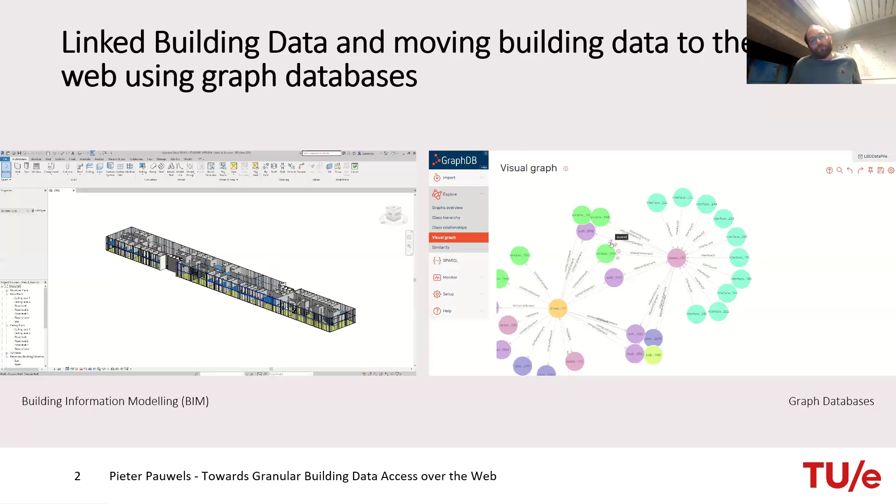So one of the ambitions that I have had for quite a long time, it's on the title of the slide, is to actually move our building data from these 3D modeling environments into the web so that we can interact more directly with it. Similar to how we are able to log into our flight, log into our building, log into our hotel, book ourselves an Uber, I would really like to be able to log into our building and actually know what the information is about this building. So that's why I'm trying to do this.

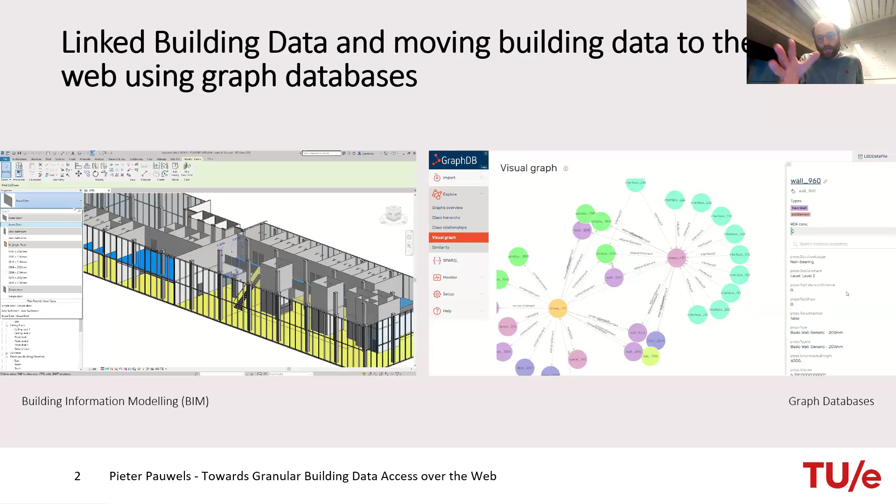During the presentation, I will cover some of the information that you can see here on the slide, which are ongoing research projects. They are situated around 3 topics, namely smart buildings, robotic navigation, and circularity.

Why is that? If I have to explain what we do in terms of information systems research, we very seldom make an IT system or a data system just for the sake of making it. We want to make it for a purpose, and these are the purposes. We want to make smart buildings with a decent background infrastructure. We want to enable circular reuse of materials and resources with a similar backend. And we also want to enable indoor robotic navigation, also using the same backend data set.

So I'll guide you through this. For this talk, I have two big parts. The first one is on buildings and semantics and gives a bit of background on building information modeling and linked building data, which is related to the topic of digital twinning. What does digital twinning look like in our building sector? The second part will be digital twinning in action, where we'll cover three example cases to show what we can do once we have a data-oriented digital twin.

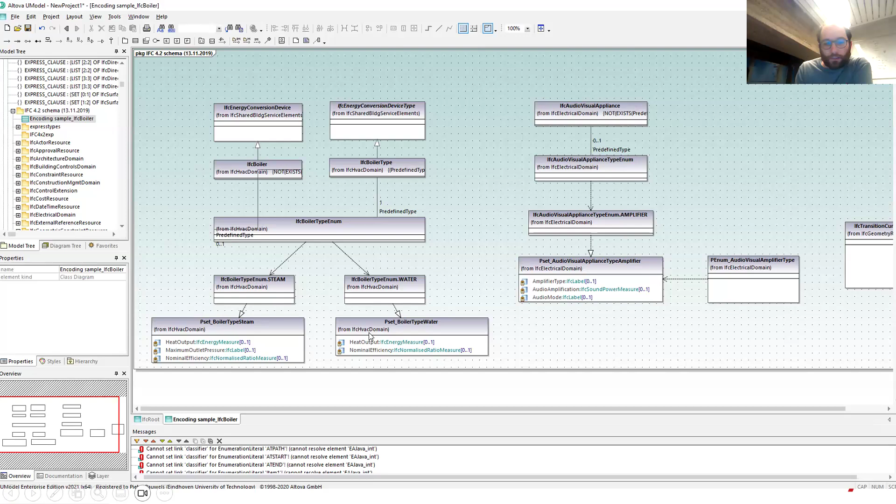And we have several schemas for that. So many of our software systems have object-oriented models. This is an example, a UML class diagram in Altova software, that shows the biggest foundational schema we have for our construction sector, which is the Industry Foundation Classes. These are the foundational classes of our construction industry, comprising approximately 1,000 classes, many properties, relationships, and so forth. So we have a full schema model for our built environment, which allows us to communicate about our built environment. The idea is that the different software environments we have are able to export their information following this format, or this data model in any case.

The data model, which is in a class diagram, or at least I kind of see it as a class diagram conceptually, has a couple of serializations. It has an Express schema, an XML schema, a declaration schema, an OWL schema. Those are on the schema level and therefore equivalent, capturing the same classes, relationships, and properties. On the object side, on the instance side, we can export our building models as an IFC file, an XML file, an RDF file, or a JSON file. So those should also be equivalent. We should be able to choose the data format we're exporting our building model in.

So what I'm trying to say here is that our building industry is a very structured industry. We try to organize our data. We have a very good class diagram of our industry foundational classes. And this allows us to actually work with the data across our industry to a good degree.

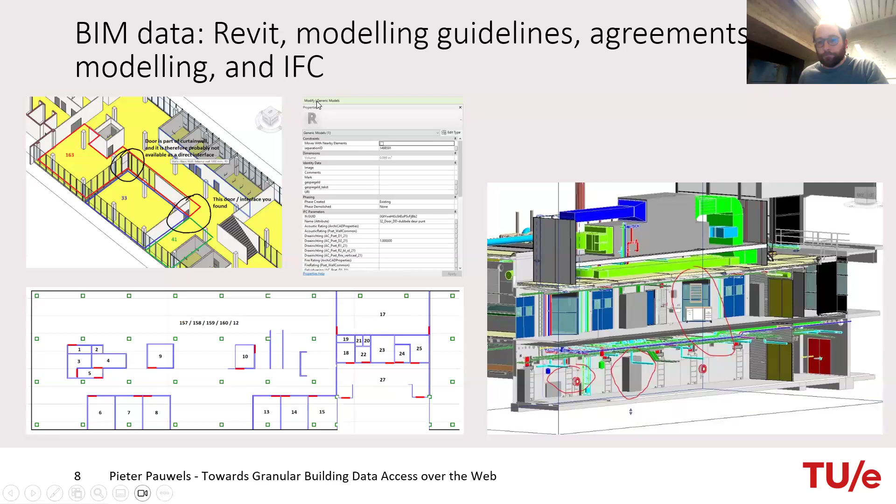But okay, so far so good. Let me give you a bit of background. In our construction industry we have a very big set of classes which allows us to define buildings using the same data model, the IFC Industry Foundation Classes data model.

One of our goals was to make this IFC schema available as an OWL ontology, so we can link it with other data sets. For example, we can link it to infrastructure data, railway, tunnel, and so forth. We can also link it to sensor data, geospatial data, and together have one large linked open data cloud of construction and architecture. So besides the real world, we could also have the linked data version of our real world, interconnected across those domains. This was 2014, so more than 10 years ago.

It's quite old, but this was the initial idea. Based on this, we formed a community group which started standardizing the way we make this IFC OWL ontology and how we link to other domains. Several of you in the room know what this has been.

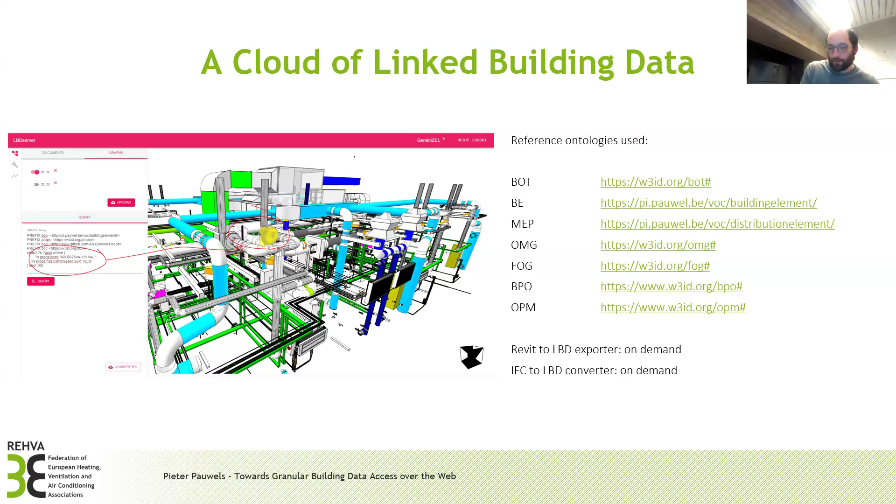So yeah, we have a whole list of schemas. I'm not going to extend much more on this, but it gives us a lot of opportunities to decide how we want to define our building and all of its information.

So this was, in a nutshell, the story of BIM and linked data. What I tried to tell you is that we have a structured building sector. We've been struggling for a long time on defining all the classes and relationships we want to store for a building, and what information we want to keep track of. In the last few years, we're increasingly trying to move to the web and make sure we can connect to mainstream software tools that allow us to handle this data on the web.

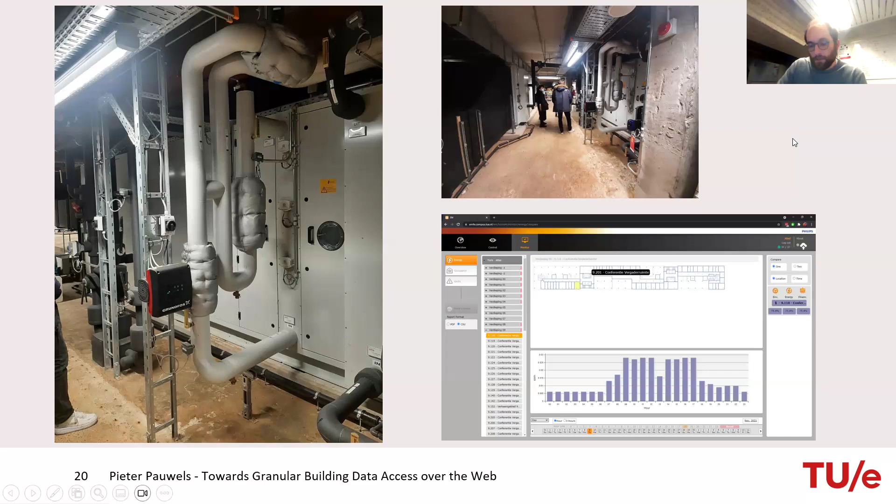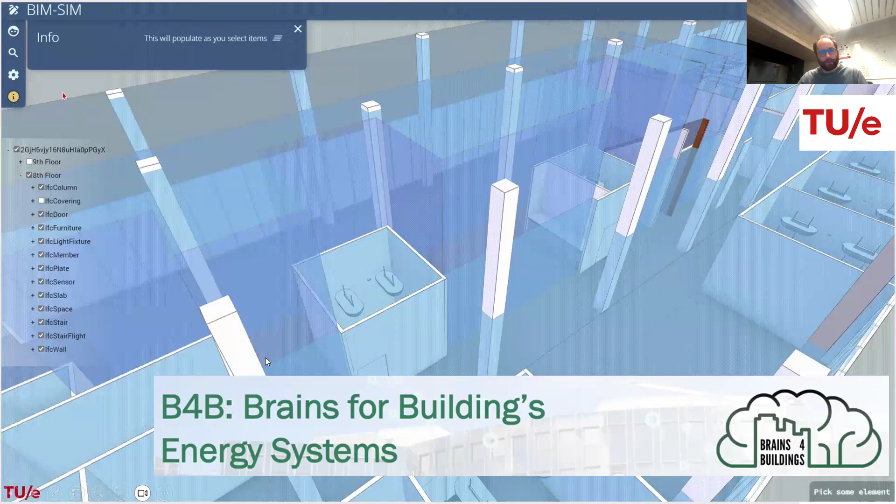This is regular IoT data, so it's not RDF. Also in the background, the 3D data is not RDF - this is just a 3D representation. The thing that is RDF, or linked data, is the actual semantics: the sensor which is in the room and what information is in the track.

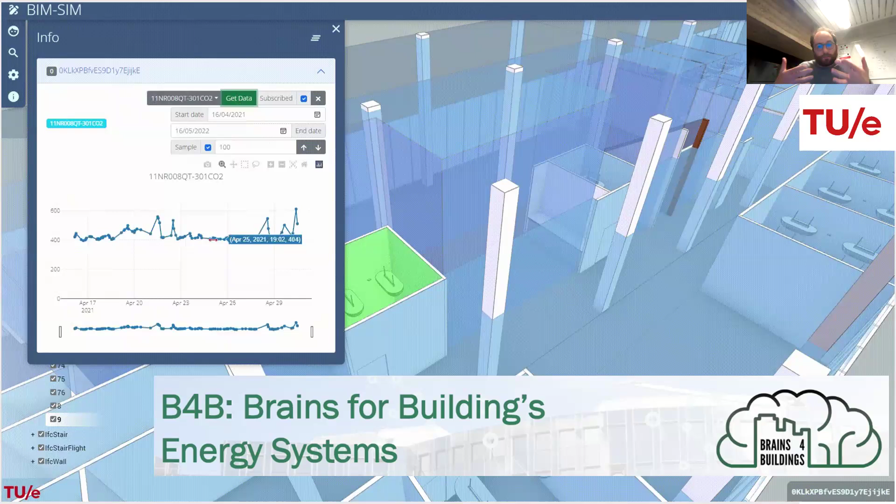So based on this, the conclusion was not that we are integrating everything in the data graph - we are actually integrating it in the entire application. So we are doing a bit more system integration rather than data integration.

Let me re-explain. What I consider this digital twin is that on the one hand we have our geometry, which is 3D components. In the middle we have our semantics, which is what everything means - we have spaces, rooms, and walls. On the right we have our IoT streams. Those three are on the server, and we combine them in a server-based digital twin.

So the integration - while many would say let's do that in the semantic graph - yeah, to a degree, but it's also needing the server. We actually need to bind the different databases together to display it. The advantage of this is that everything is in a server, so we can also organize user access and security. So that's not bad.

Okay, so nowadays that's kind of a default setting that we have. And here now you can see some of the work that we do.

So here we have on the top right the digital version of our campus. We can select a building and then go to a story to retrieve the sensor data, which is on a different server. So that's not in the same graph, or in the Unity game environment, but it's actually being retrieved from where it is stored. This allows us to do system integration, and the goal is that we can integrate with the commercial vendors, so we can retrieve it from the owner of the data and make decisions.

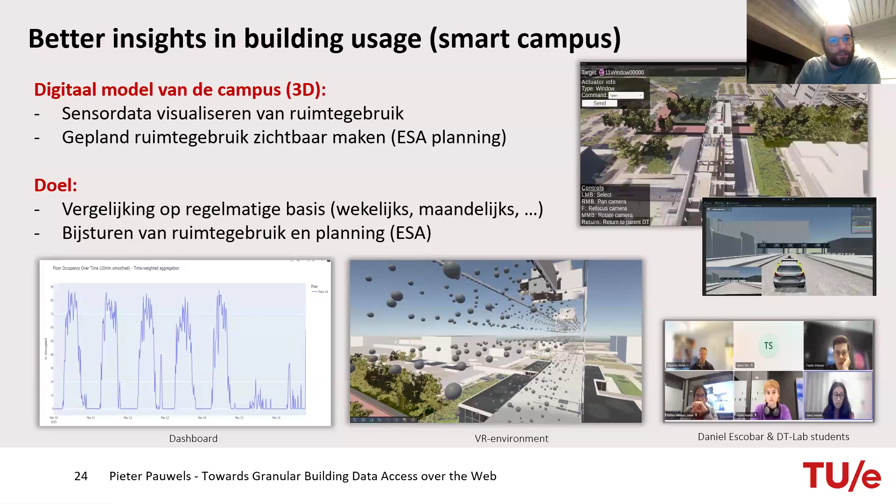Of course, we also want to do a presence sensor. How often are our rooms being used, and what's the floor occupancy over time, and what can we do with this? I'm sorry, the slide's mostly in Dutch, but you see what I mean. In the same way, we want to track the presence of people in the buildings, but we also want to see the systems that we have in our buildings.

So here we have a bit of our bidirectional communication. You can see here, by the way, the identifier. Based on how the building is operating, and based on the access, based on the planned occupation of the rooms, we can send signals to our HVAC system to make sure we have the right comfort, right temperature, right humidity, right lighting in time. So that's something that makes the bidirectional communication possible.

And what we noticed there is that we really need to include not only the data side, but also the control. So we need to send control signals to those devices. That becomes really important.

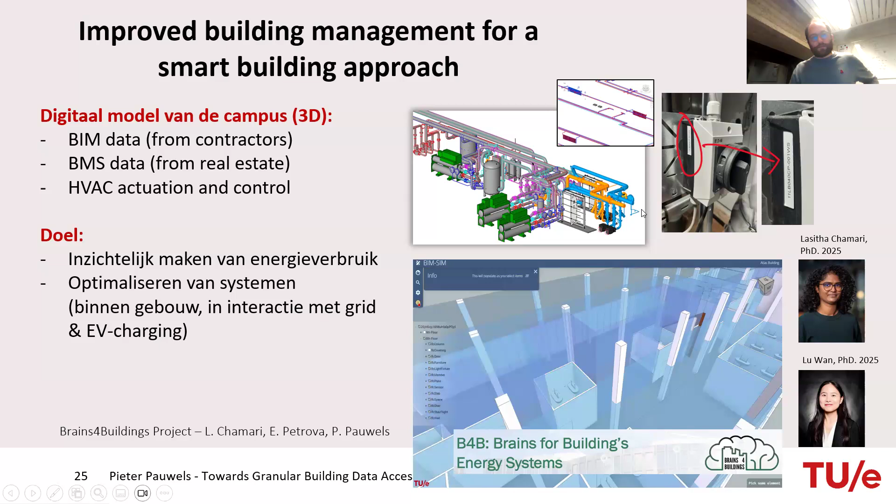And this is something that we also do in another project with Lu Wan from Bosch. So here we integrate our graph database for the building data. We have our sensor data, which is in a separate database. This is integrated. And then the question is to have a good control model on the top, which is coming from domain expert HVAC engineers. Based on the data that they retrieve from the integration layer, they can improve the model for control, so we have a better, more comfortable building.

Okay, so that's the first part. This is about smart buildings, and you can see that the idea is to move our building data on the web, so we can access it and make good decisions and actions. For me, that's a form of a digital twin in any case. And of course, it needs a lot of work.

The nice thing is that we can reuse the same data somewhere else. Because it's web-based, we don't need to exchange the file. We can just log in if we have access.

So a second case that we're looking at is this circular material reuse. Circularity is actually reusing of materials. As many of you probably know, our built environment is one of the most consuming industries. That's because we have so much concrete, steel, brick. We're always placing something in the world. So we have lots of resources, and to reduce the impact on our planet, we should reduce the material consumption.

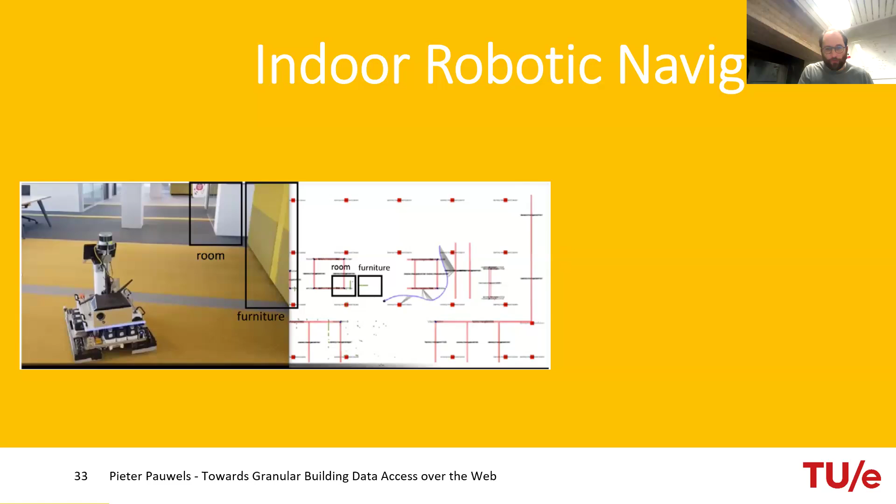Why do we want to do that? There are a couple of reasons, but usually we want robots to take on tasks that are either pretty boring, too repetitive, or dangerous. There's also a case for last mile delivery, delivering a package the last mile, let's say.

Anyway, we wanted to move our robots through this building. What does a robot then need? It needs a topological map and a metric map. It needs to know the topology of the building, which space is connected to which, and then the measurements or sizes.

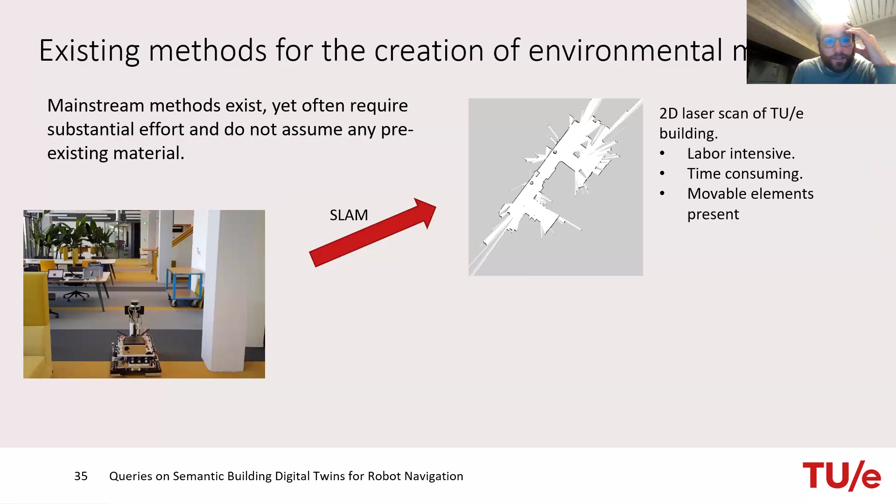How do robots typically work? They typically use a SLAM method. You go with the robot through the building, map the entire building with the laser scanner, and then it knows where it can go and where it cannot go. Using that output, it can navigate autonomously.

Alternatively, you can manually create a world model, which looks a bit like this. The robot knows it can navigate on this red area, but cannot hit the blue, for example. Doing that is labor intensive, and this is also labor intensive, and we only know the basic environment.

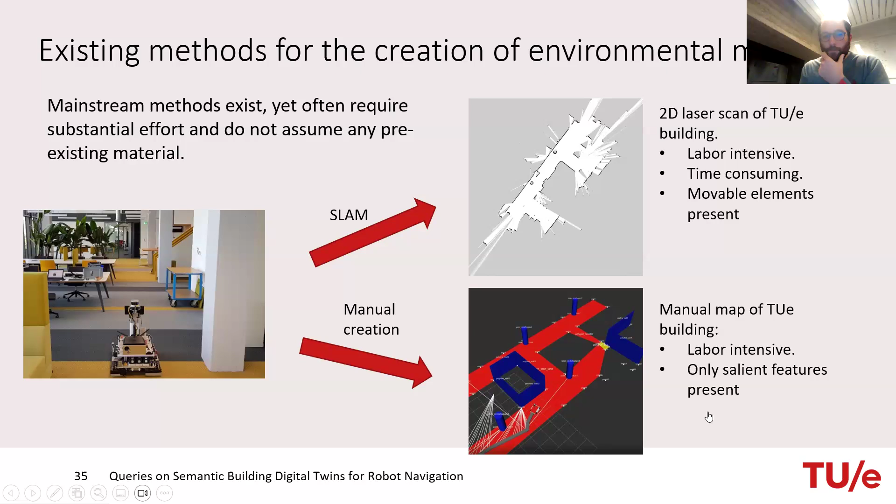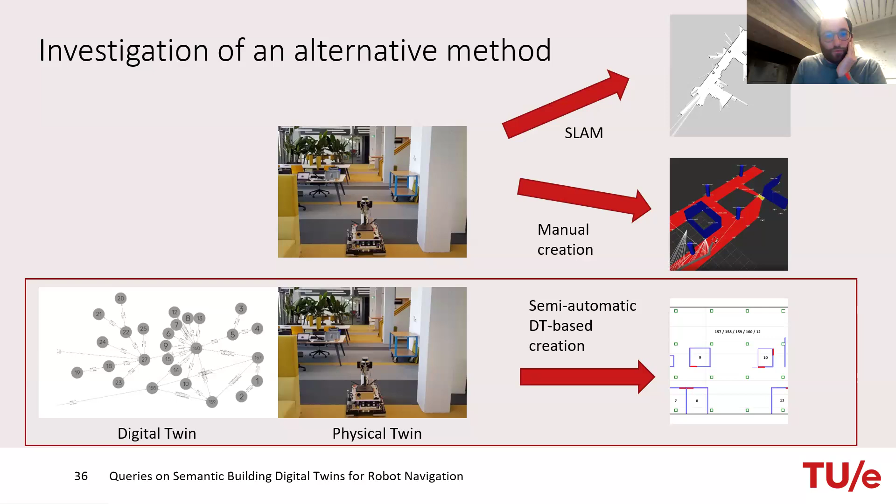So the idea was to open this up, to basically rely on the BIM model, or digital twin of our building, the same Atlas building. Based on that digital version of our building model, we can semi-automatically create this environment and navigate directly without having to localize our robot. I really like this project, and I really appreciate that we're able to do this in the same building as the smart building stuff.

So that's really nice. We looked into a couple of data transfer methods. You can do it file-based, but we're actually trying to move into a server-based approach, where you can see this LBD server with JSON data. We're looking into what works well.

In general, what does it look like? So for a building, we would have our spaces. This is a space. In the space, we know that they have adjacent elements, surrounded by walls and slabs and doors and so on. It contains our sensor devices, and also has, for example, a door included.

This is a door, and the door has a 3D shape. This is a 3D shape of that door. Between the door and the space is an interface, so you can see the interface is between the space and the door. And this one has a two-dimensional line representation, so I know I can go through this door at this line location. That's the ID. So based on this RDF graph in the server, we can create this map.

In principle, for this example we have 3D data and 2D data. We could extend it also with 3D data like point clouds and more, but we're working with simpler data. That one is then used by the robot to connect from the LiDAR, detect object features, which are then corners and others, and those can be connected to semantic objects from the BIM model. So our robot can navigate through this building.

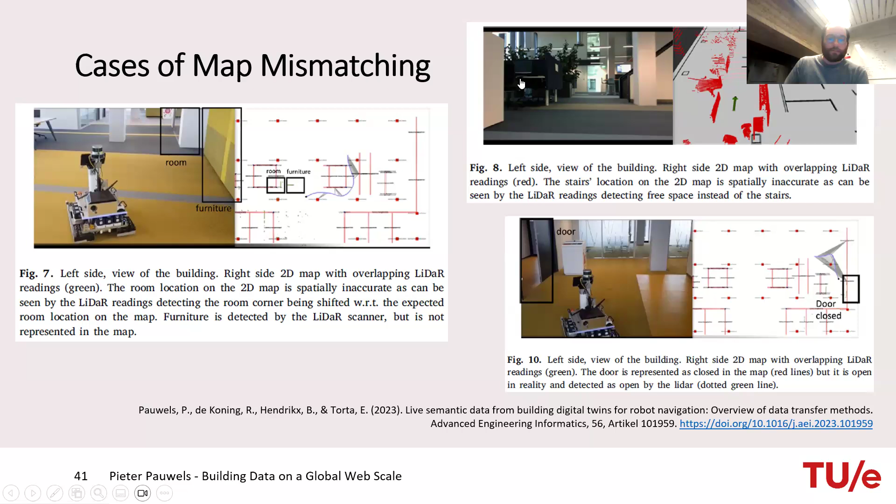So based on this, what we are currently looking at is to actually update our BIM model, or update our digital twin, based on how the robot is navigating. So let me just go forward here a bit.

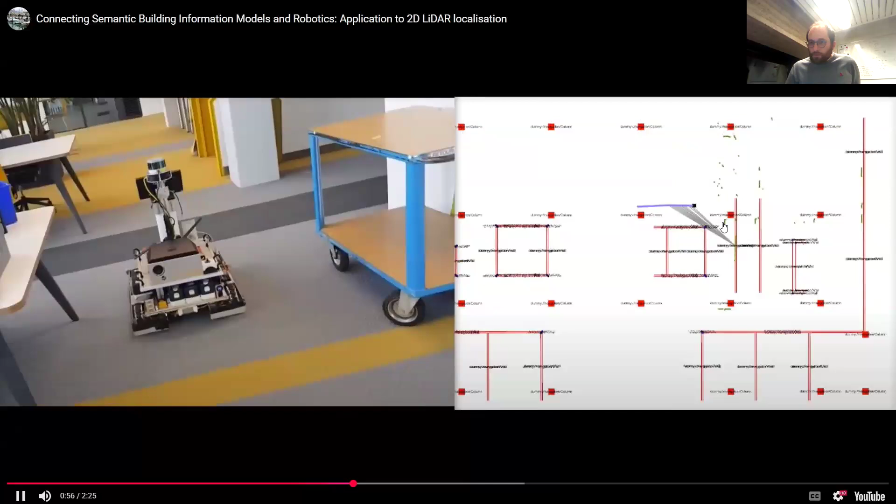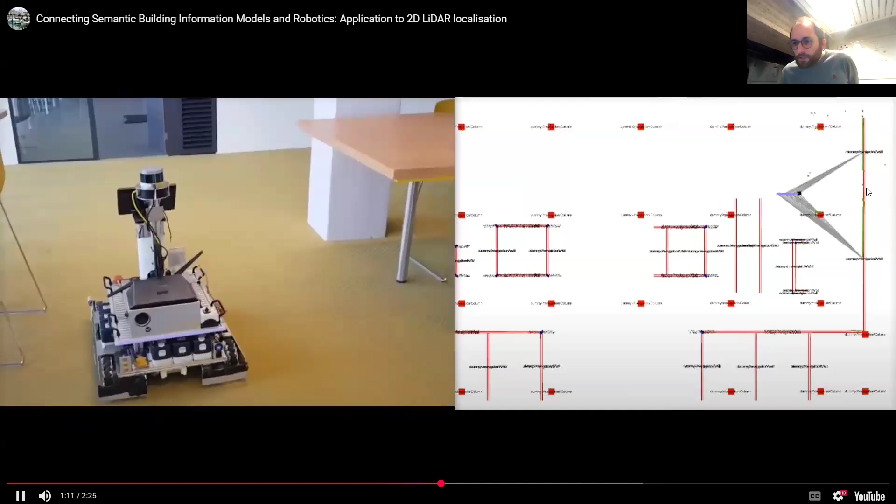So basically this robot is driving, and as it is driving, it is collecting those points. You can see it will go through this staircase in a while - there's no staircase, but it's here on the map. It sees the columns and those features, and those features need to be matched. The wall is nicely in place. You can see the door here, which is missing.

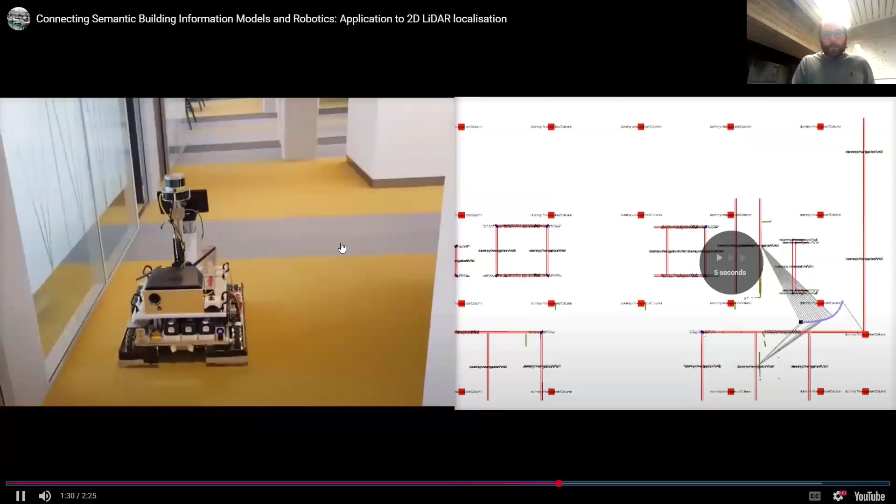So based on these features, we can actually recognize a few things, and then maybe the added value is to update our BIM model. So this keeps on going for a while, and I will stop it here.

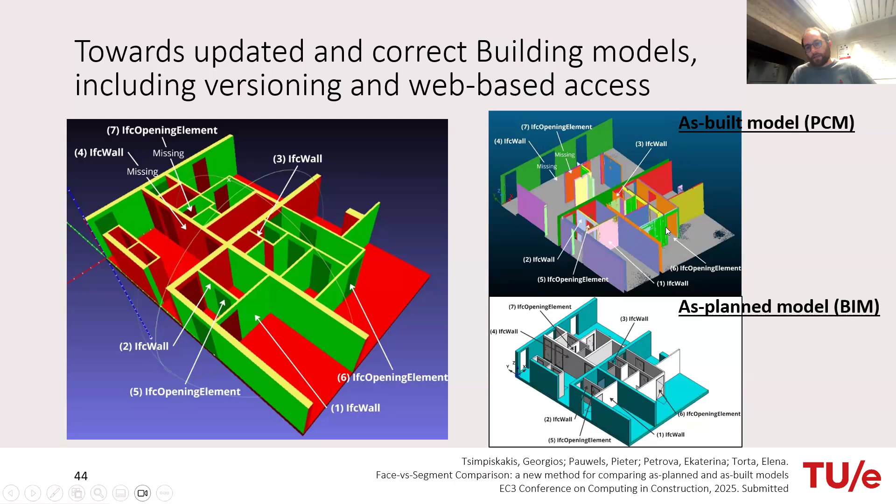The idea is now that we try to actually recognize elements from either point clouds or images to then update our building model, which is in a database. So it's actually quite doable - it's not like it's a separate file. Those are things that we're currently doing: recognize faces, recognize walls, recognize doors, to then make particular updates. And then our as-built model becomes really as-built.

That's where we are now. So sorry for rushing through this. I wanted to give you a big overview of BIM, linked data, and digital twins, to make a good data background, a data backend, which allows us to do smart buildings, circular material use, and also this robot navigation. And in principle, they should be able to work on the same or a similar data set.

So final notes: what I generally like is that we're able to do many cases with linked data, and it's pretty doable to represent this building information into these graphs. We have a preference - I have a preference for RDF, not that much for labeled property graphs, but anyhow, there you can actually do it quite easily. Not everything is going into those graphs - we also have good storage solutions for geometry and sensor data.

And I would really like to go to this more granular data storage and systems where we have this data with an object, and if the object moves, data goes along, and we do this on a more global web scale.